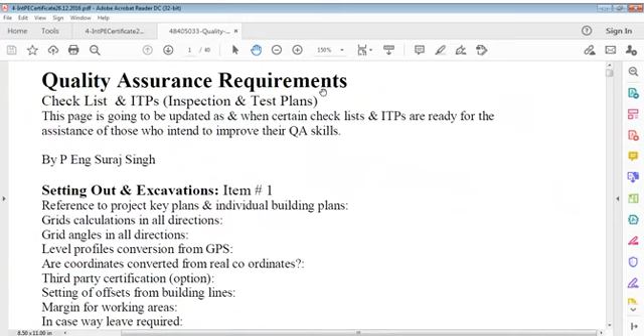...the world exists, the earth exists, planets exist. This is what nature is giving us as service.

He's giving us service. We have to realize that if we are taking service from sunlight, means we are taking service from the sun. Is it wrong? Are we not taking it? The sun gives us everything. But scientifically, it is established that it is 15 crore kilometers from Earth, 150 million kilometers, a crore being 10 million kilometers from Earth.

If God can provide service so remotely, it means some object is fixed at 15 crore kilometers from here, and if we get service through that, it's extremely exemplified service. One sun is equivalent to, if you combine all the power stations of Earth, I think you may not find that much power as the sun alone has. And to think of the size of the sun, I'm just talking about the size of the sun, not other planets.

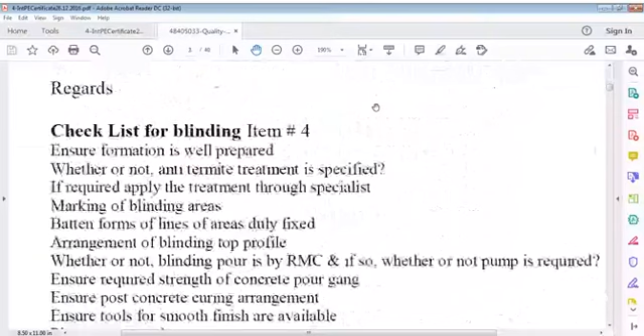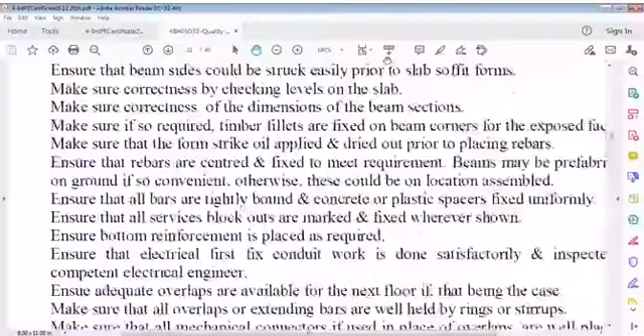I talked of excavation, then we went further for hand excavation, then formation, grade slab, staircase, stairworks, and also RC suspended slab. Then we went on to pedestal footing block, RCC footings, then generator and alternator foundation.

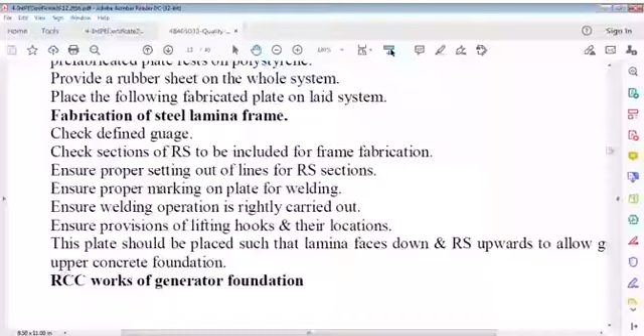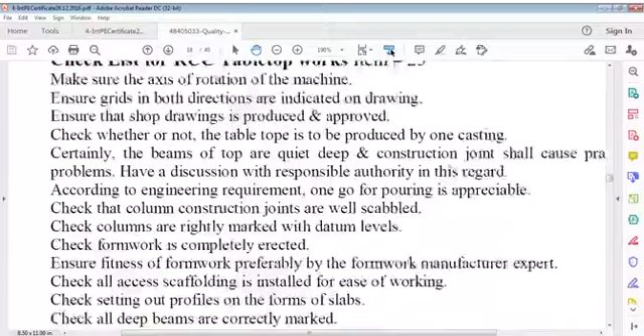I try to show them a checklist of RCC where structural work, architectural finish, and hollow slab - and you can say RCC sloping portion. Then compressor foundations, which we talked of yesterday and elaborated - that tabletop. Then swimming pool, it's big, and wellness tank, and a firing shooting range - we just enlisted its components.

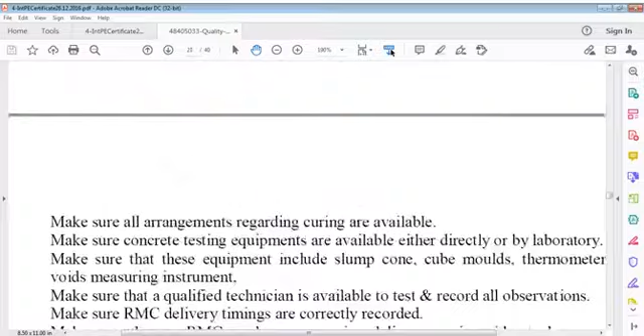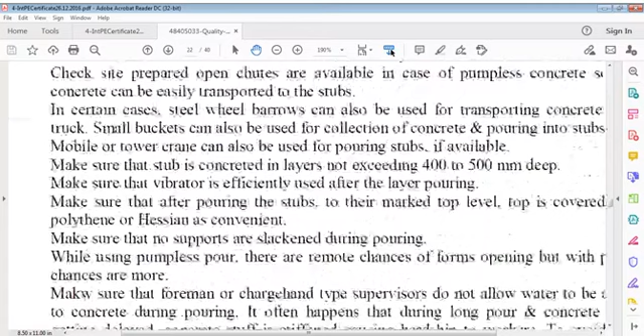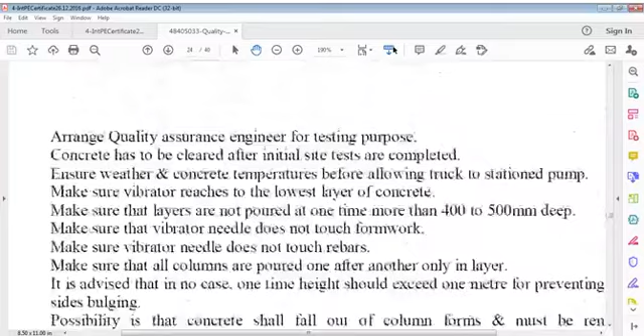Then we talked of stub columns, concrete pour, and like that - RCC walls concrete pour, and lift well walls concrete pour. This is all concrete pour moving here. We'll do a little refreshing and make fast all the concrete cores, because concrete pour is an important activity - it's not so simple, concrete pour itself. This is foundations we have talked of, and concrete pour - I think that was 6.

Before going further, I also have some material for you that I was searching for. It's good if you can see what I can search out - you can see this is shooting range.

I can write here if I can - shooting range, so that you know what I'm talking of. Shooting range, I'm simply writing shooting, just for understanding. Shooting, that's it.

And it's over, so this is shooting now. Also this is shooting, another one. This is also shooting, so I will write shooting here so it will be clear what I'm talking about. Similarly, it is also shooting - just I can give like this, shooting here.

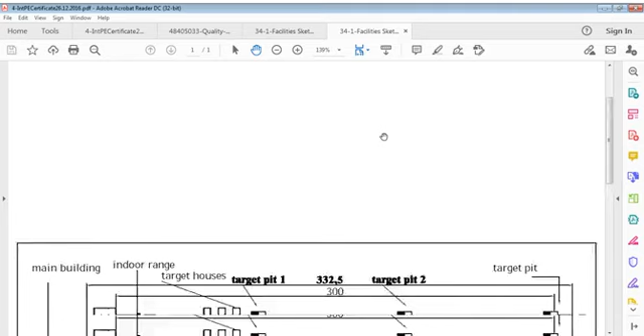This is one sketch here. We will discuss this, and I can say that another sketch where it is another shooting, same, but you can say - what is this? Meaning here, same sketch but a little more defined. It's the building, same as I said before.

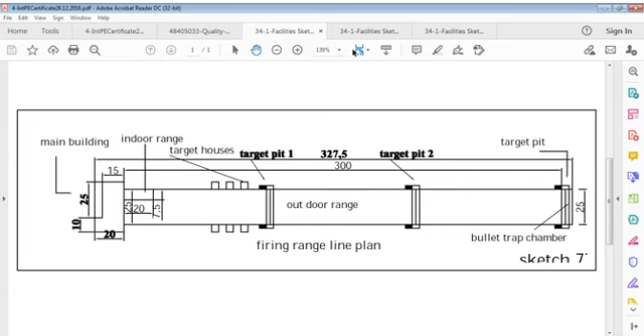Roof over down steps, down step, this covered area, this one here is covered, this is covered, roof on this, and this is below ground here, that is this one, RCC wall 6 meter sketch, this is all. So we have here, you can see, this is one sketch, line plan exactly, because I was talking of shooting range, and then it was with this section, and you go further, it's little like this.

This is what I mean to say I was talking of, and this is not bad to understand something here. How we handle this, that's an important point, how we handle this.

Now let me show you something else also before going further, and it is, I talked about lift, you remember. I'll show you that, then I'll close that file and I'll start talking.

You see, I'll better rotate this so that it's more useful to view.

You see this, it's very important sketch for every engineer to see, lift formwork, typical site fabricated. And this is note here, insert door, internal form, 16T bolts to be sleeved in, sleeve to stay permanent. Sleeve means PVC pipe in which your bolt is inserted and is taken out later on, but PVC pipe remains in concrete forever, and it's sealed. And calculate forces for decision, details are indicative.

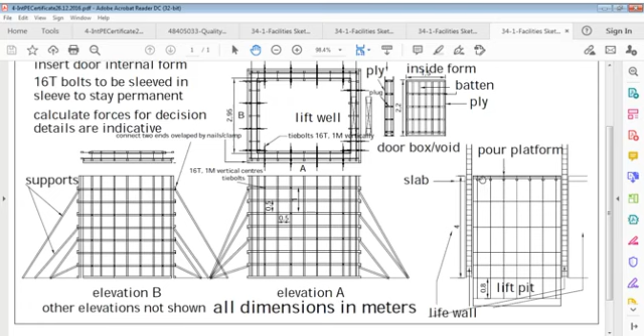And here lift pit, this is lift pit which is at ground, meaning this is the elevation. Below here is lift pit, which is also, you can say, wet pit. This is platform here, this is platform here, and this pour platform we call it. So we stand here and pour this portion of wall, 4 meters of height, and below there is lift pit which is 0.8 meter.

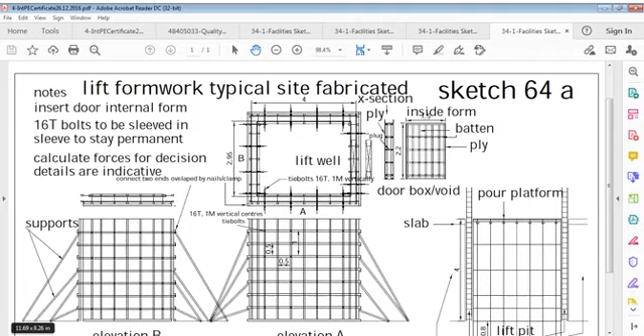Then, what should I say, sectional tank and RCC wall form. That's also very important, RCC wall form. You can say RCC wall form.

This goes, rotate counterclockwise. This is also a very important point here. RCC wall, let's say 30 centimeter wall or whatever, though thinner walls are more dangerous.

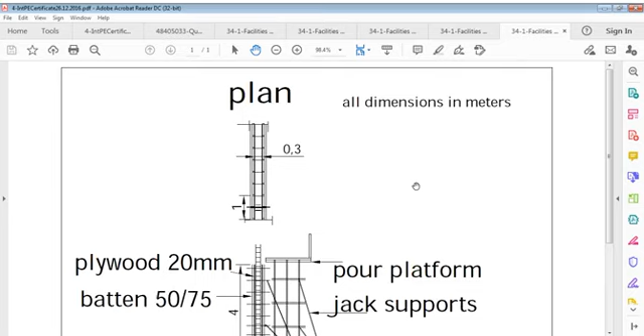This wall section is 4 meters high, and this is scaffolding here, the working platform, or pour platform, pouring platform you can say. That jack support is here, and this is your scaffolding, and here you connect somewhere. This is the bottom, you can see the bottom support here also. This is scaffolding support, for holding it in position.

This is the 1/3 height resultant force here, just to hold it in position. This you can arrange. Then this bolt is 16 tor tie, 20 mm plywood. Then battens 50 by 75 mm and 16 tor tie bolts here, all tie bolts which are left in PVC pipe. This is jack support, you can say, half to 1 meter center.

Then RCC wall formwork system, site fabricated sketch, and this also I have shown about this formwork, without which we cannot do anything. I just tried to work it on AutoCAD, just to use it and know how we do it, and that's a very important point.

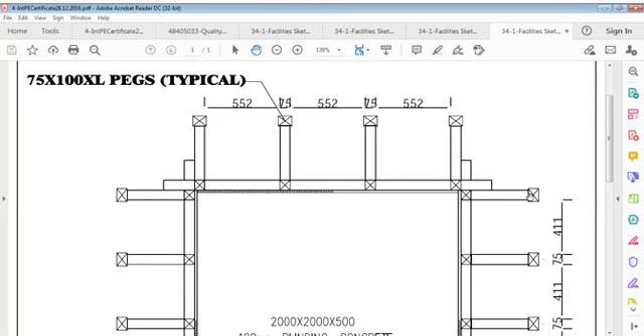RCC footing, and this dimension is 2 by 2 into 0.5, with 100 mm blinding concrete below, and that is this blinding concrete, use section wise. This is the shutters, its details are, this is inclined and horizontal supports, while this is plywood. Here you can see plywood all around, internal size 2 by 2 by 0.5, and this is all packed here.

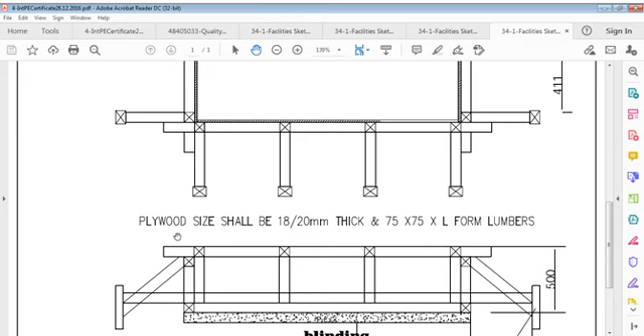So plywood size shall be 18 or 20 mm thick, and 75 by 75 by L form lumbers, they call it lumbers also. This blinding, it's just a typical sketch. You see these packs in, and this is a form you can fabricate here. Internally this is ply, so it goes somewhere, this forms in here.

So if you view this, you can see, you will find better understanding for what we are talking of. Most important point is what you're talking of, something like this. So it's a very isolated kind of independent footing, meaning the basics of this 50 centimeter high. So you see yourself in 2 meters, 1, 2, 3, about half a meter.

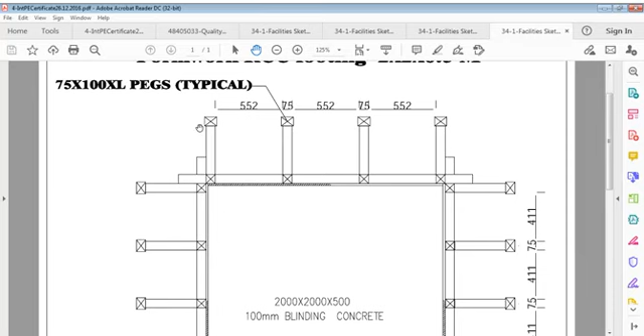So these three spacings, this one and this, how many? Because of this, when I put more, no problem, we can think of what to do. 3, 4 spacing, and all these same spacings of half a meter, because it can be more also, but it's better.

That is what you have to do, good work, and that's where the remark pieces are. If you see this in elevation here, you will find this, and this supports these pegs, and these are just on top to hold everything. This is your formwork here, so that's what I wanted to show you. Because of requirements, we should know what we are talking of, the sketches sometimes are very important for work.

Sometimes one sketch can give you the whole idea, even when many pages cannot.

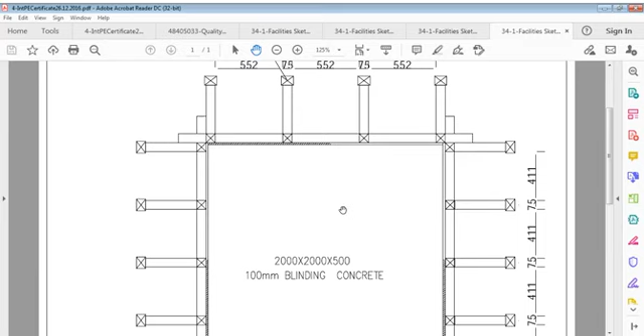That was the purpose of including this sketch and taking some time to project it on this talk. The purpose is just to let you know what is done. I'm not taking this file off yet. I think you've seen it now. It's very simple, not very complicated. So I'll take it off, and if required, I'll open it again. I just tried to explain this, which is most important here.

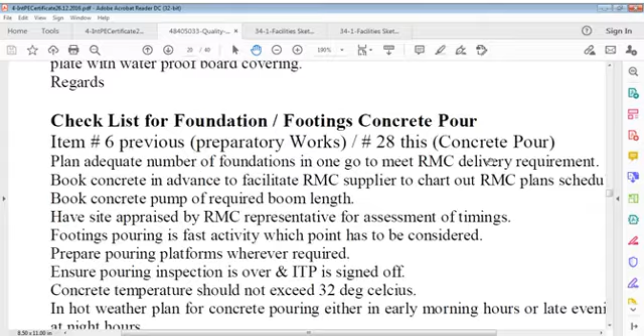So let's see where we reach now. This is the concrete pour. I explained to you about the foundation, which I just showed you, and I think you understand that. So let's go to another one.

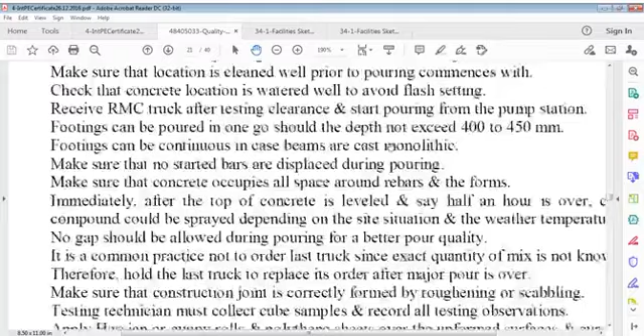Temperature range is most important in this, and we will see what we do for concrete pour for this one. Then stub columns we discussed, it's okay, we should move forward.

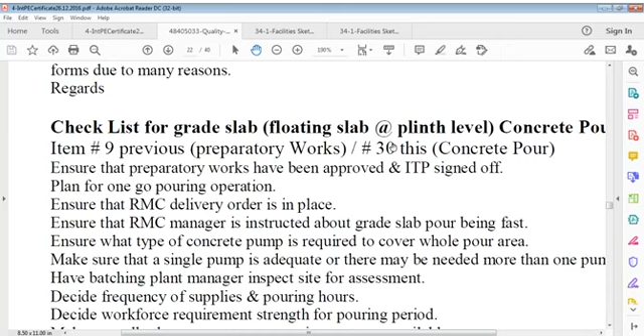Then grade slab, because it's concrete, let me see. I told you stub columns concrete is very small. You may do this by crane or manually, or you can receive ready mix concrete and do it.

Now let's talk about grade slab. You know what grade slab is, what I'm talking about. It's plinth level slab, actually it's called grade slab, or otherwise at ground level also. You may call it grade slab depending on your requirement. Everything depends on requirement, and if you have the requirement clear, we can do what we want to do.

Checklist for grade slab. What is the checklist here? We have to understand that preparatory works have been approved, and ITP signed off. But what are preparatory works? Well, we talked about item number 9 previously, preparatory works, so you can refer to that.

But we have to pour now. Its type is now concrete pour. It is checklist - we have to decide one-go pouring or two-go pouring. One go is preferred because as much as possible you do it one time. There's no beam in this ordinary concrete. Ordinary in the sense the area may be big.

It's just BRC sometimes embedded in only, not all. If you don't have this welded wire mesh, which you call BRC, it has a designation of whatever kind, which I explained to you before also. This designation of the mesh depends on how many square millimeters of steel wire are in 1 meter length, and that gives you the designation of the wire mesh, welded wire mesh.

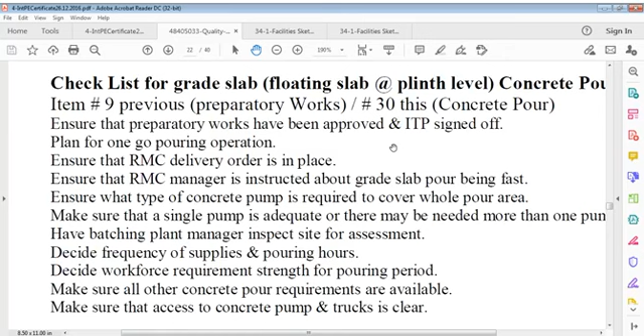Then what type of concrete pumps - make sure that a single pump is adequate, or there may be a requirement for more than one pump. That being on site, you have to decide.

Then, have the batching plant manager inspect the site for assessment, which on every major pour, it's better to call them because they know much about their equipment. We don't have any idea about this - as far as they are experts, we are not.

Then the batching plant manager inspects the site, and after that, we decide the frequency of supplies and pouring hours. This means how many minutes it should take for one transit mixer to arrive. If you can empty that one in 10 minutes or 5 minutes, then you should get another one immediately.

That sequence proposal you have to discuss with the required manager, the batching plant manager, and they will meet your requirement, decide frequency of supplies and pouring hours, and decide workforce requirement and strength for the pouring period, because it's a fast pour. You need strength of people accordingly so they spread this material as soon as possible without holding it on site. Even on grade, you cannot hold material more than specifically required.

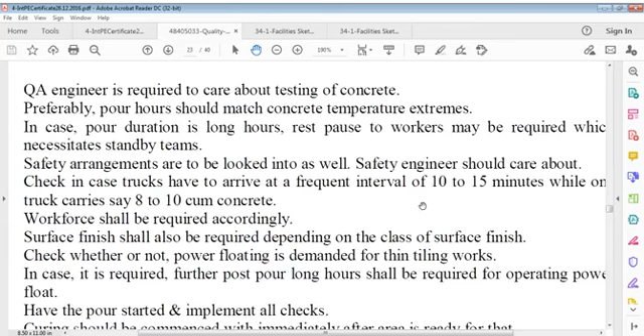Safety arrangements are to be looked into as well. Safety engineers should care about this.

Check in case trucks have to arrive at a frequent interval of 10 to 15 minutes, which is reasonable, while one truck carries say 8 to 10 cubic meters. That's where we have to stand to determine how much workforce shall be required, according to how much concrete you are casting.

After that, surface finish shall also be required depending on the class of surface finish. Generally we take a wooden finish, not a steel finish, because it is to be covered by flooring. It depends upon what sort of flooring it is—you may have very thin flooring, and generally it may not be necessary.

Maybe according to the specification you have to finish this with what is called power float. So you have to keep ready within a couple of hours to check the whole area with power float and do that.

There are ways to understand surface finish requirements depending on class of surface finish, and we have to check whether power floating is demanded for thin tiling work. Certainly it is demanded in very expensive projects, like this hospital project.

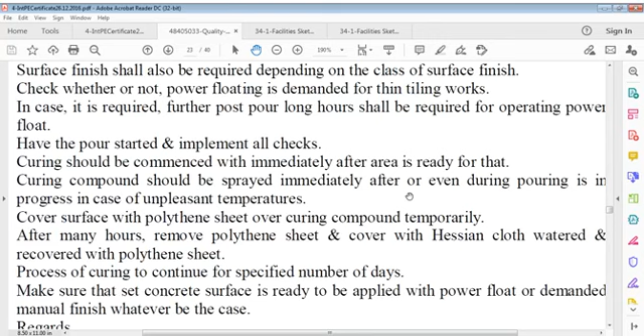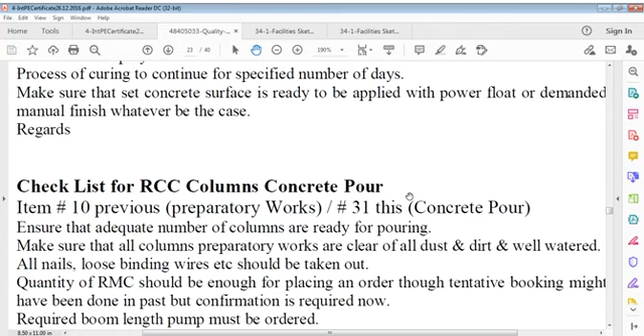The process of curing continues for a specified number of days. Make sure the set concrete surface is ready to be applied with power float or the demanded manual finish, whatever is given in the specification, and that's what completes the grade slab.

Now we have here RCC columns concrete pour, important one. RCC column concrete pour, and facility sketch here is, well, it's no column here, fine, no problem. RCC column, it's item 10, I'll show you a sketch as well. So this is item 31, concrete pour column.

Column is not just something I have to tell what it is, but it is a very important part of the structure, the frame. Though we call it column, in fact this is a bending member as well, like a beam, it's a bending member. Column is also a bending member. To be very frank, a column should not be bending, but practically in all buildings, columns are bending members.

People in ordinary life can't realize this. They may say, okay, beam is fine, load is coming on that, but only that load is coming on columns. They do not know that column can also have axial loading, and it bends, not only due to axial loading but also due to sway, horizontal forces. So it's not easy for everybody to realize.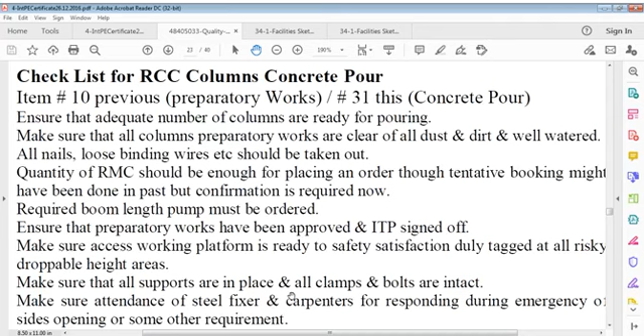Required boom length of pump must be ordered, whatever pump you need, that is the requirement. Ensure that preparatory works have been approved and the inspection test plan, or ITP, is signed off.

Again I say pump may not be available. You have to keep this in mind, because pumps remain occupied all the time on major projects, and the ready-mix concrete supplier is a commercial person who will see how much concrete you are requesting. If you require only 2 or 3 cubic meters and engage a pump for that, it's sometimes very difficult to find a pump from the batching plant, and it delays your concrete. So you have to be ready with a plan to tackle that.

Now make sure the access working platform I showed you earlier is available there. It's not available there. The access working platform must be ready to safety satisfaction, duly tagged at all risky droppable height areas, and make sure that all supports are in place and all clamps and bolts are intact.

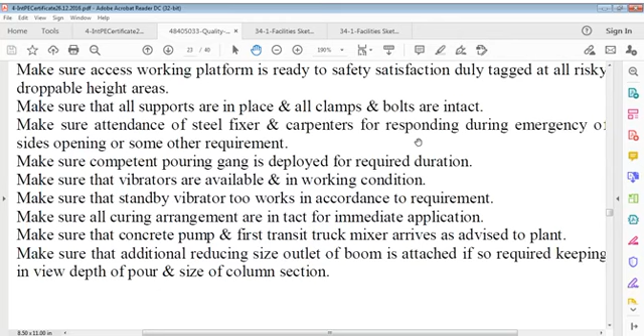Then arrange a quality assurance engineer for testing purposes, or a quality requirement engineer rather than assurance engineer. Quality engineer is the better term. Assurance is a very old word, and this is an old file, so I'm just changing it simultaneously as I speak.

Concrete is to be cleared after initial site tests are completed. That means you have to clear it, and to do that you have to ensure weather and concrete temperatures before allowing the truck to go to the stationed pump, meaning wherever the pump is working, you have to send the concrete truck to that location.

Also make sure that the vibrator reaches the lowest layer of concrete. Your vibrator nozzle should have enough length or chute pipe that it reaches down to the concrete level for purposes of vibration. Otherwise we'll find loose concrete or voids or some other major problem which would cause issues in future. So you have to ensure that your vibrator nozzle reaches the lowest layer of concrete.

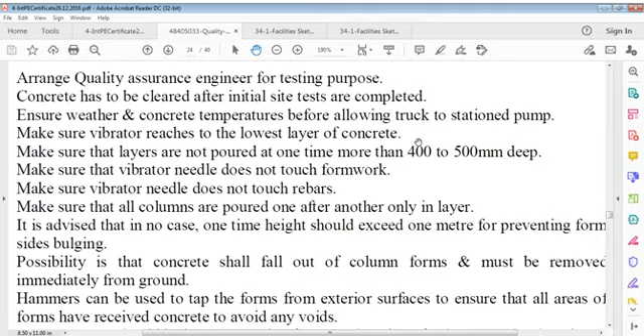Make sure that all columns are poured one after another, only in layers. It is advised that in no case should the one-time pour height exceed 1 meter, to prevent the formwork sides from bulging. So at one time you should not pour more than 1 meter, which means maximum 3 layers one after another, then you shift to the next column. So that 1 meter limit, I think, is okay.

The possibility is that concrete shall fall out of the column forms and must be removed immediately from the ground, otherwise it will set. Hammers can be used to tap the form - ordinary small hammers, not big ones, just to make sure there's no hollow sound. Hammers can be used to tap forms from exterior surfaces to ensure that all areas of the forms have received concrete, to avoid any voids.

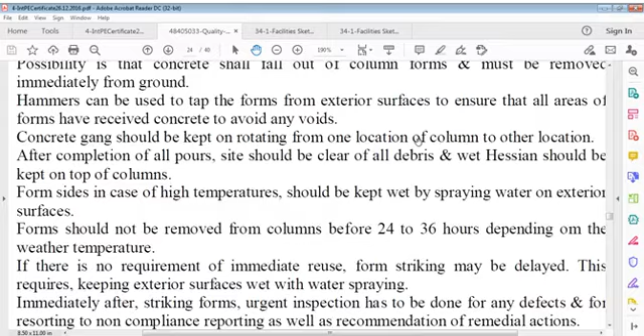Form sides, in case of high temperatures, should be kept wet by spraying water on exterior surfaces. Forms should not be removed from columns before 24 to 36 hours, depending on weather conditions. Then, if there is no requirement for immediate reuse of the form, form striking may be delayed.

This requires keeping exterior surfaces wet with water spraying, and partly, thermal curing is also affected. Because the column is closed on four sides, only a small section is open, which can be closed by adhesion and covered with polythene, so that the whole system is thermally treated.

Then you can say it's better to delay the next repetition. If you have no scope open in your system, in your site, then you can say...

Immediately after striking forms - striking means removing the form - urgent inspection has to be done. Inspection by yourself for any defects, and for resorting to non-compliance reporting as well as recommendation of remedial actions - both compliance or non-compliance, and if there is non-compliance, what remedial actions are required. This must be acted upon by both quality and concrete engineer.

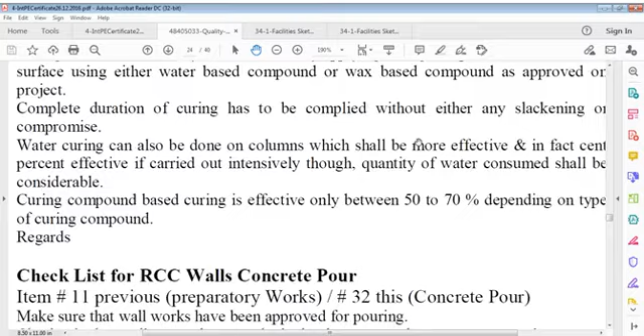Let's say this is item 11 of the past one, and this is item 32, concrete pour. Make sure that wall works have been approved for pouring—that you have to make sure all the time, and whatever you do, it should be approved from that viewpoint. Make sure that wall works have been approved for pouring, and then check whether walls are to be poured by pump or by crane, tower crane or mobile crane.

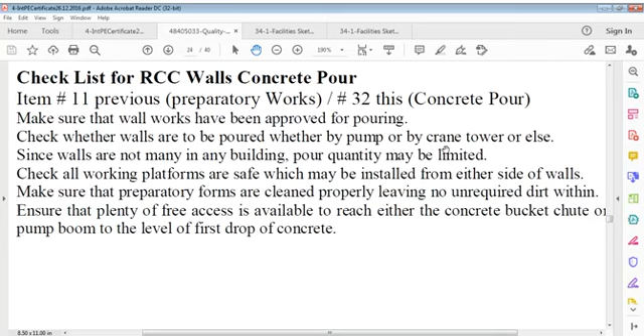Then make sure that preparatory forms are cleaned properly, leaving no unrequired dirt within. All preparatory work platforms are cleaned properly, leaving no unrequired dirt within. Ensure that plenty of free access is available to reach either the concrete bucket, chute, or pump boom to the level of the first drop of concrete. This applies for crane, both mobile crane or tower crane, or for pump.

In certain cases of thin wall elements, say 15 centimeters, possibly a reducer shall be attached to the end of the original pump boom at the disposal point. Check all concrete pouring inventories as explained in previous lists—we have to do that. That is what I see as important: we have to check all the concrete forms. That is an important item.

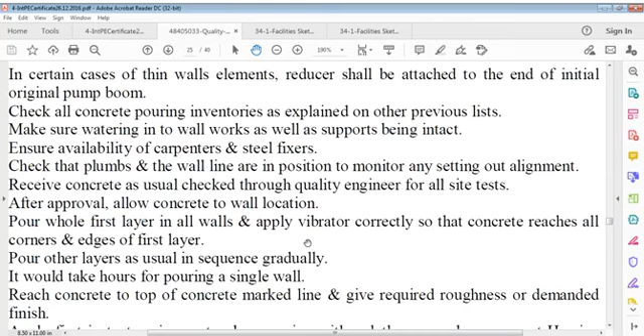Now receive concrete as usual. Check through quality engineer for all site tests. After approval, allow concrete to wall location where pump is stationed, and pump will take care of that.

Pour the whole first layer of all walls, first layer same 400mm. Apply vibrator correctly, rightly, so that concrete reaches all corners and edges of the first layer.

Pour other layers as usual in sequence gradually. It would take hours for pouring a single wall - yes, that's true. Quantity may not be big, but hours will be required because it's a wall and we have to be very careful because there are chances of bulging in the wall.

Being a thin member compared to the size, reach concrete to the top of the concrete marked line and give required roughness or demanded finish. After first instant, cure the top by covering with polythene membrane or wet Hessian cloth. Make sure there is no opening of forms.

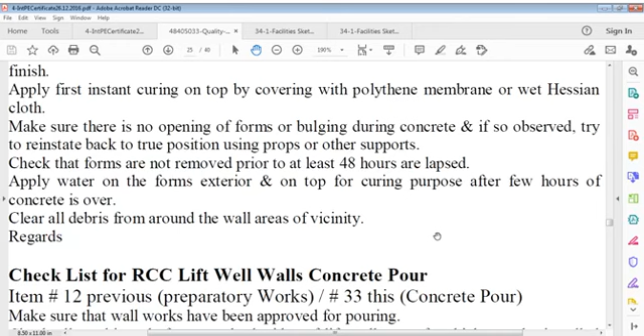Clear all debris from around the wall area of vicinity. Then if you think you need to pour curing compound, you can go ahead, no problem. Same procedure for curing compound - you have to sprinkle water after inspection of defects, then immediately cover with curing compound.

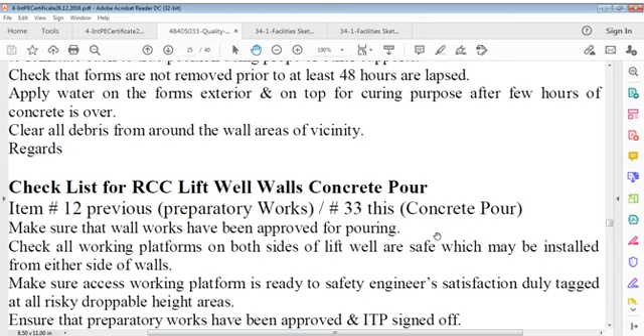And then you can see the checklist for RCC lift well walls concrete pour, which is a big one. You can see notings here, RCC lift - meanwhile it's an important item, a very important one. You can see important noting, important sketch, very important for everybody, and it should be clearly done. If it's done, it's done, and if it's not done, it's not done. So you have a few minutes to go through this - I can assure you it's good for you.

It's a sketch, you can meanwhile read this sketch. Five minutes, hold on please.

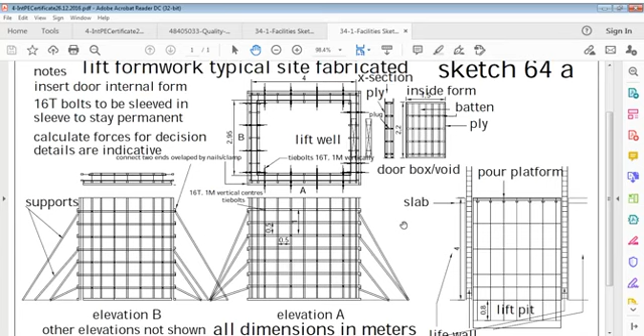This is RCC lift well walls, and make sure that wall works have been approved for pouring. Everywhere this is the first point - whatever you pour, it must be approved. If you are supervisor, you are the authority to approve, or you are the contractor's person, you have to approve. Whatever is the procedure, you have to approve first, then someone else, and then someone else. It is a sequence in methods - who are the approved authority, in what you do, so you do that for yourself. Then wall works have been approved, meaning there's no other way, it should be approved.

Now check all working platforms on both sides of the lift. Working platform means internal as well as external, same platform as I showed here - this is a platform here. And outside also there is a platform which is not shown here, but it means it should be there, either this or that. Or if you can control from one end, you can control from one end, no problem. It's up to how efficient, how powerful your system is, that's more important.

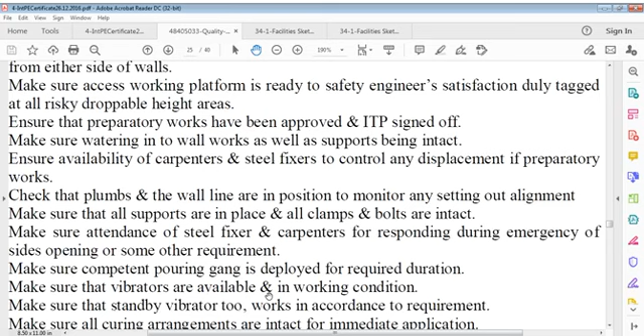Then I will ensure availability of carpenters and steel fixers as usual, for any mishap, to control and combat that. Whatever displacement of preparatory works is expected should be avoided by immediate attention from these carpenters and steel fixers. Check the plumb and wall line are in position.

Plumbs all the time, everywhere, are applicable, and wall lines both, everywhere these are applicable. So plumbs and wall lines are in position to monitor whatever setting out alignment, and make sure that all supports are in place and all clamps and bolts are intact.

That's a very important point, because supports are in place and all clamps, or shikanjas as you can say, or bolts are in place. Also make sure attendance of steel fixers and carpenters for responding during emergency of sides opening or some other requirement.

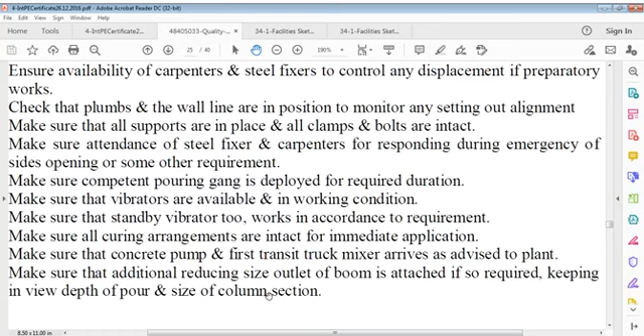Make sure competent pouring gangs or crew is deployed for required duration. Also make sure vibrators are available and in working condition must be made sure. And also standby vibrator too, are available, and these must be in accordance with requirement working conditions.

Make sure that curing arrangements, whether by curing compound or water, are intact for immediate application. Make sure concrete pump and first transit truck mixer arrives as advised to batching plant managers.

Also make sure additional reducing size outlet of boom is attached if so required, keeping in view depth of pour and size of the section - it's actually wall section, by error I said column section, apologize for that.

Then we have to arrange quality engineers for testing purposes, and concrete has to be cleared after initial site tests are completed.

Ensure weather and concrete temperatures before allowing truck to station at pump. And also make sure vibrator reaches to the lowest layer of concrete, and layers are not poured at one time more than 400mm or maximum 500mm, because 100mm interlocking is required in the second layer, third layer, so the previous one is interlocked with 100mm.

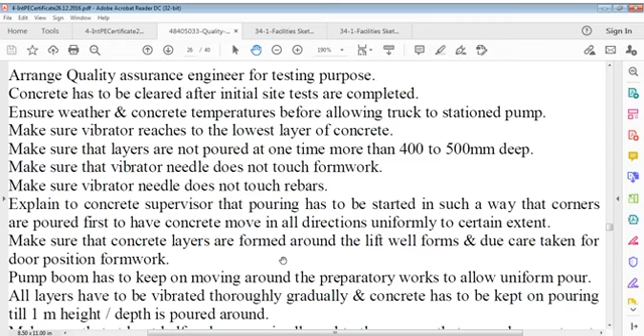Also, vibrator needle does not touch formwork as well as steel bars, and explain to the concrete supervisor that pouring has to be started in such a way that corners are poured first, to have concrete move in all directions uniformly to a certain extent, because it's a lift.

Make sure concrete layers are formed around lift well forms, and due care is taken for door position formwork. That's what's important. And the pump boom has to keep on moving around preparatory work parts to allow uniform pour.

All layers have to be vibrated thoroughly, gradually, and concrete has to be kept on pouring till 1 meter height in layers, and depth is poured around.

Also make sure that at least half an hour gap is allowed to pour, so that poured concrete sets to a certain extent but doesn't form cold joints. We don't allow cold joints in whatever concrete.

Keep in mind, pour other layers till 2 meters high. Depth is completed and allowed to stay another half an hour for resting, for settling.

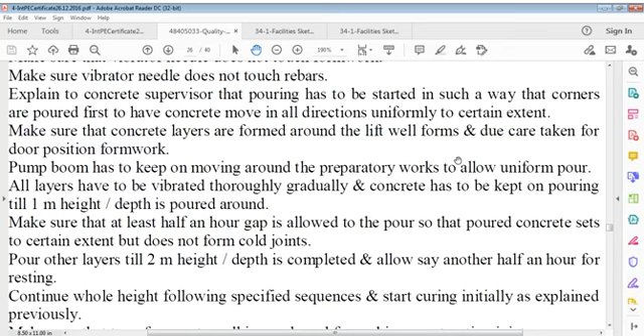Continue through the whole height following the specified sequence and start curing initially as explained previously, meaning from external as well as from top. Make sure top of concrete wall is roughened, for making the construction joint.

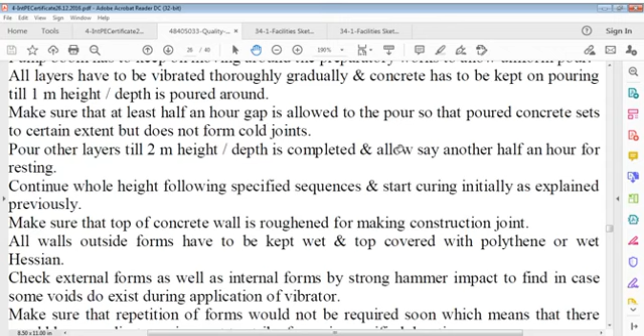All walls outside forms have to be kept wet. Outside forms have to be kept wet, and top covered with polythene or wet Hessians. So you have to cure it in hard from outside on forms itself. All walls outside forms have to be kept wet, and top open layer covered with polythene or saturated Hessian, you can say not wet Hessian.

When we are suppose at this level here, it is complete pour from 2.1 meter to whatever height, 4 meter or 3.5, that is complete pour here. So problem is only in this pour.

So what I stated, let us say we start here, pour, fast moving, going this way, move fast, going this way, going this way, and coming this way. Let's say it's 0.4 meter depth you pour in one go.

So approximately how much it is? Let's say 4 meters, and let's say this is 3 meters. Approximately I'm taking 3, 6. Let's say 4 and 4, 8, 8 and 3, 11, 11 and 3, 14. But minus, let us say 1 meter. So this is say 13 cubic meter, 4, 8, 8 and 3, 11, and this is say it is 13, 12.5, or then let's say 13 cubic meter, and 13 into 0.4, I think it is 0.3 or 0.4, whatever it is.

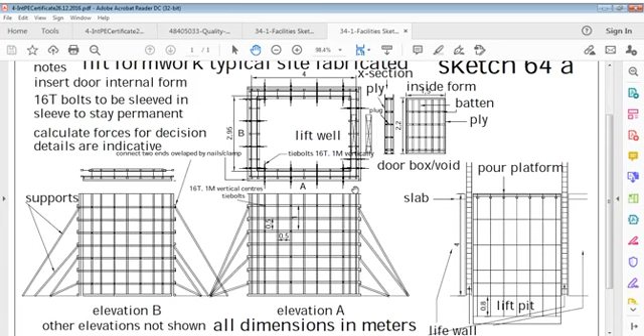This is 0.5, 5 square meters. 5 square meters here, this surface area, plan area, 5 square meter. And if it's multiplied by say 4 meter height or 3 meter height, so 5 into 3, 15 cubic meter. If it's 40 centimeter, and it is 30, it is 3/4 of that, so this is about 12-13 cubic meter.

So you have to pour at least 1.5 truck mixer here. So it should be fast moving in total, and then suppose you are going to pour in 3 layers or 4 layers. So this is 3 cubic meter in each layer. So you are going to pour 3 cubic meter.

You have to be careful about this. In this go, in one layer is 12 meters, as I said, 12 into 1, 12 cubic. This is 4 square meter, 5 square meter, 5 square meter into 1 meter, 5 cubic meter, 4 cubic meter. You are going to pour in 1 meter height, and in one layer is 1/3 of that height.

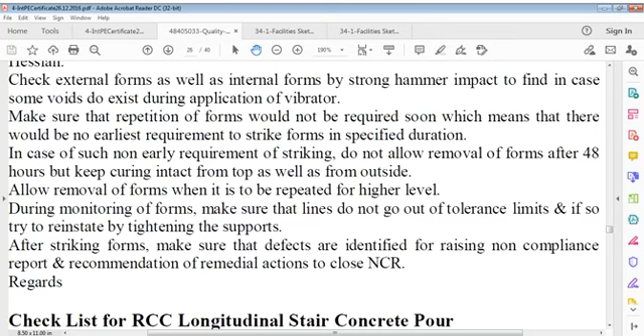So I think we have gone 2 hours on this - it's 2 hours 39 minutes, so the third hour is running. Let us see how we can move now.

It is RCC longitudinal stair concrete pour.

I think I must have drawn it somewhere - I don't exactly remember where, or if I drew it at all. That's my weakness to know. Let me see if I can find something in this. If I can find it, I'm not sure. Trying is never wrong, so let's try. This is not it, this is not, this is not, this is also not, this is not, okay this is not, this is not, this is not, this is not, this is not.

I'm trying to bring you sometimes reasonable work.

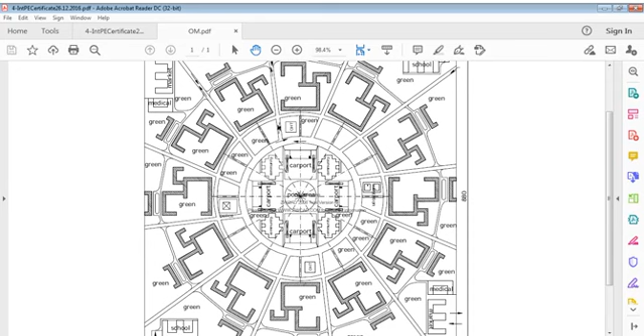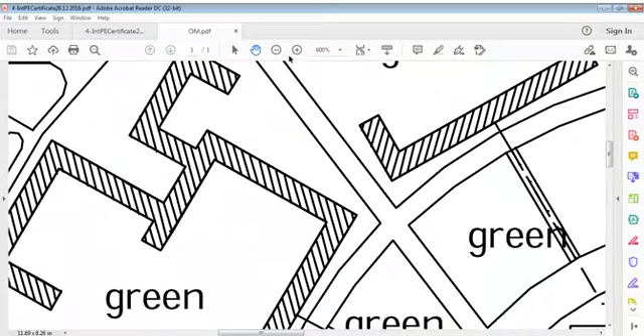You can see this below me. It's interesting, really interesting. This is just to see how engineering works. How many, see, 1, 2, 3, 4, 5 - how many divisions are there? That's fine to understand really. Is it 3, 4, 5 here? 5 to 7, and 7, 5, 12. So 12 divisions here, 30 degrees each.

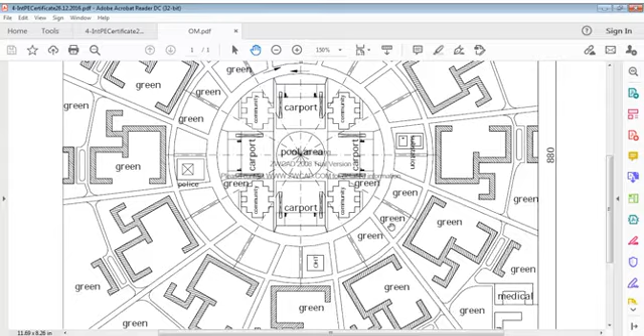It's wonderful, isn't it? I think it's appreciable, engineers can do this. So engineers are not sleeping, you can do a lot like this. Alright, now I'll take it up again next time. I'll close it today with this. I think I should. Thank you very much. I'll take this up later on. Right now, I'll close it.